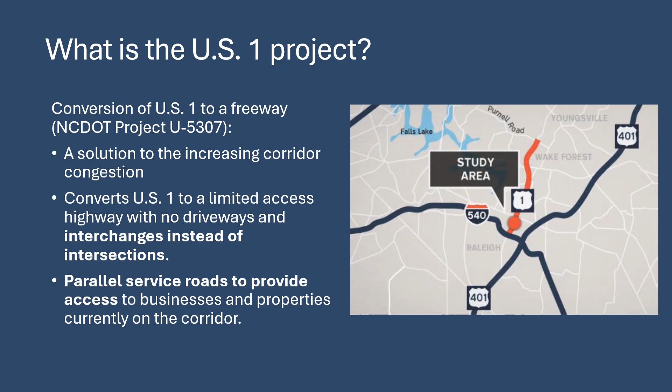So how did we get here? This project to convert US 1 to a limited access freeway has been planned for many years. The 2025 Long Range Transportation Plan, adopted by the region in 2001, highlighted US 1 as an extremely important corridor that was in need of upgrade quickly to handle the current and future traffic. Following that plan, in 2006, the US 1 corridor study was conducted to create the preliminary design for how this road might look. In 2007, the local municipalities, CAMPO and NCDOT, formed the US 1 Council of Planning, an ad hoc advisory council for local planning decisions.

Over the past nearly 20 years, the council has reviewed and worked with nearly 100 developments along the corridor to help preserve right-of-way, ensure development designs were consistent with the US 1 corridor study, and inform the developers of the future project. In 2012, the project had its first break when it was first programmed in the State Transportation Improvement Program, the budget the state uses to pay for road projects. However, since then, cost increase and project delays have led us to being no closer to having this project constructed than we were in 2012.

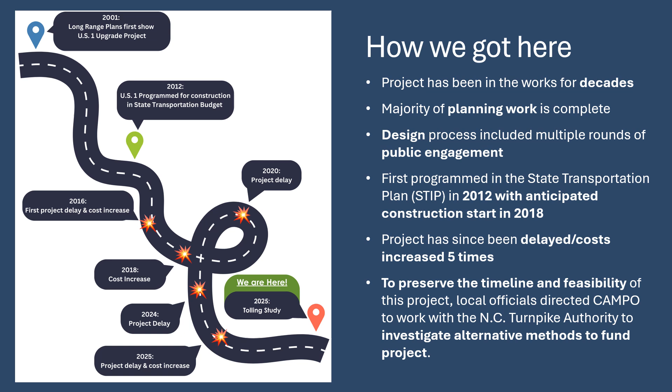As such, local officials directed CAMPO to work with NC Turnpike Authority to investigate alternative methods to fund the US 1 upgrades.

The cost increases and delays took this project from an original budget of $93 million with an expected completion date by 2023 for the first sections to today, where the draft state transportation budget, expected to be approved in June, shows a cost of $1.34 billion with a project completion date sometime after 2035.

Part of the cost increase was when the project was expanded to include Segment D, from NC 98 to Purnell-Harris Road, but most of the increase is from the increased cost of right-of-way and construction cost.

Due to the repeated project delays and uncertainty when the project could be completed, CAMPO requested North Carolina Turnpike Authority to investigate this corridor as a potential tolling project.

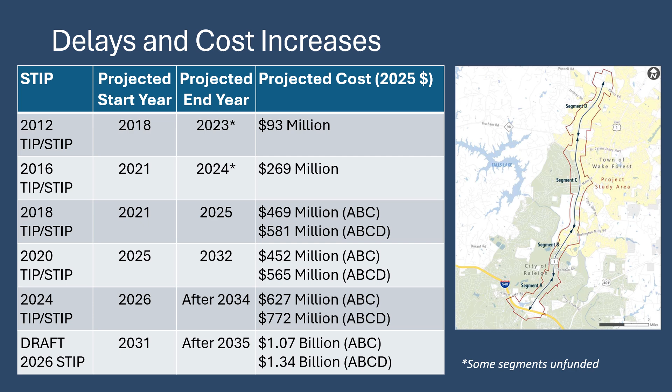An expressway project would be very similar in scope to NC 540 in western and southern Wake County. A fixed electronic toll with a posted speed limit of 65 miles per hour. All intersections and driveways would be removed, and these would be routed as part of the project to either an interchange at Durant Road and Perry Creek Road, Burlington Mills Road, the Falls of Neuse Road, NC 98, Durham Road, and Purnell-Harris Road, or a service road that is constructed as part of this project. All service roads constructed would be public roads and not tolled.

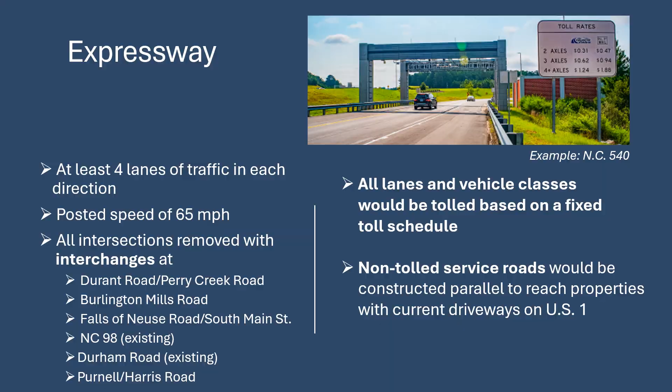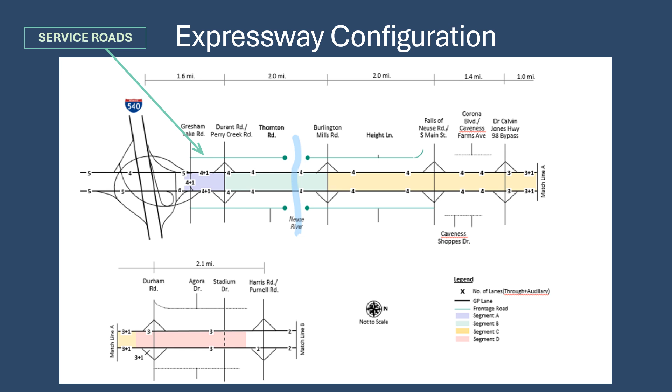The design of the expressway scenarios would include all 4 lanes being tolled. Service roads, the green lines indicated by this design, would be constructed as part of the project to provide access to the properties that would lose direct access to US 1. These service roads would remain public roads without tolls.

In an express lane scenario, similar to I-77 in Charlotte, this would construct a single toll lane along the US 1 corridor. This lane would be separated from the general purpose lanes, requiring additional right-of-way and a wider road, which leads to this option's higher cost.

This project upgrades the corridor to a freeway, removing all intersections and driveways along the corridor. These accesses would be rerouted to new interchanges in the same locations as the expressway scenario, with new and existing service roads constructed as part of this project.

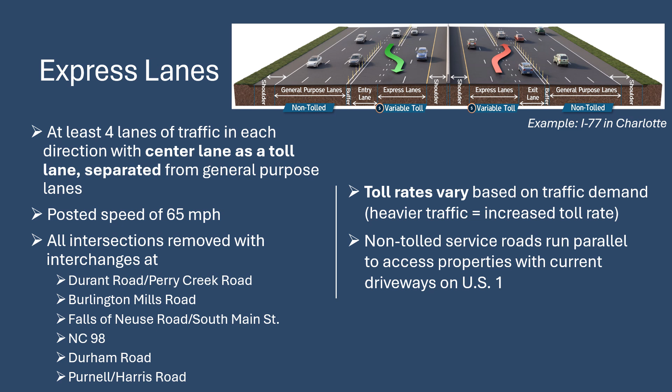Tolls for express lane options would operate dynamically, meaning they would change depending on congestion. The higher the congestion at the time, the higher the toll would cost.

The express lane design would include 3 general purpose lanes. These lanes are not tolled, on the outside of the road, and then 1 tolled lane that would be separated from the rest of traffic on the inside lanes. These can be highlighted in the red lines on this diagram.

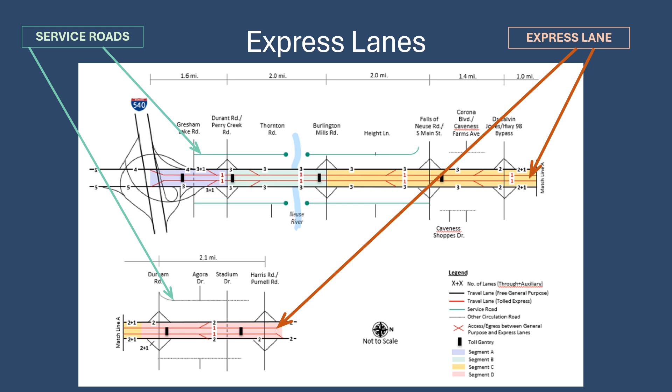There would be several areas indicated in the diagonal red lines on this diagram that would allow for entry to the toll roads. The service roads shown in green would be constructed as part of this project and remain public use roads without a toll.

In scenarios 2 and 4, these scenarios revolve around whether the US 1 corridor project is included as part of the larger Triangle Expressway system. This is the financial vehicle of NC 540. Being part of this system would allow NC Turnpike Authority to increase the possible financing to further this project more expeditiously.

The inclusion of the Triangle Expressway system is currently prevented by North Carolina General Statute 136-89.188, Section A, which requires tolling systems to be connected to each other to be part of the same financial vehicle. To move forward with either of these scenarios, it would require legislative action to allow the use of revenue.

For the expressway options, it is assumed that not all traffic would take US 1 and would instead utilize alternative routes. This may include roads like Falls of Neuse Road, US 401, and Lynn Road.

As part of the study, an analysis was performed to determine the level of impact a tolled route could have on local routes compared to a toll-free route, as well as what would happen if upgrades to US 1 were to never happen, also known as the no-build option. This analysis looked at forecasted conditions in 2040 based on anticipated growth and development according to local plans.

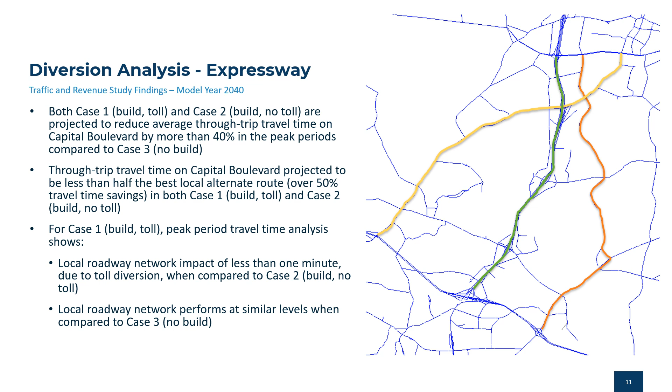This analysis shows that with a tolled structure, local roads will not exceed their planned capacities, with less than a minute of increased travel time added compared to a non-tolled US 1 with upgrades. When compared to a no-build situation, a tolled route performs similarly on other local roads for traffic congestion.

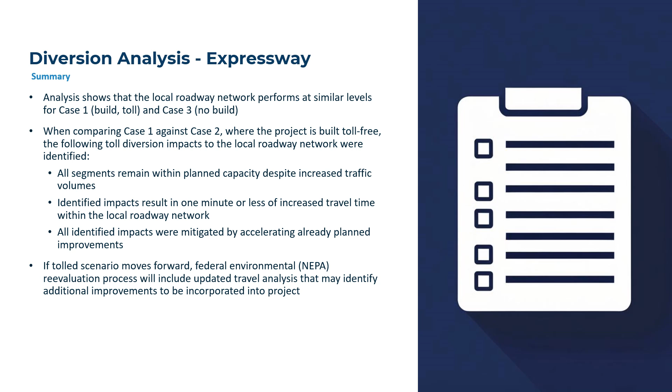So what are the next steps? This public comment period will be used to help determine the next steps. In North Carolina, the decision for tolling a road is a local decision. NC DOT and NC Turnpike Authority cannot proceed with a toll project without local approval.

The CAMPO Executive Board will meet at their May 21st meeting to review the results from this public comment period and deliberate on the next steps for the region.

The region can stay the course and go without tolls, which may have construction starting in 2031 and completion sometime after 2035, or pursue tolling, which may see project completion as early as 2033.

If pursuing tolling is decided, there are still several steps and opportunities for further public engagement before any project starts.